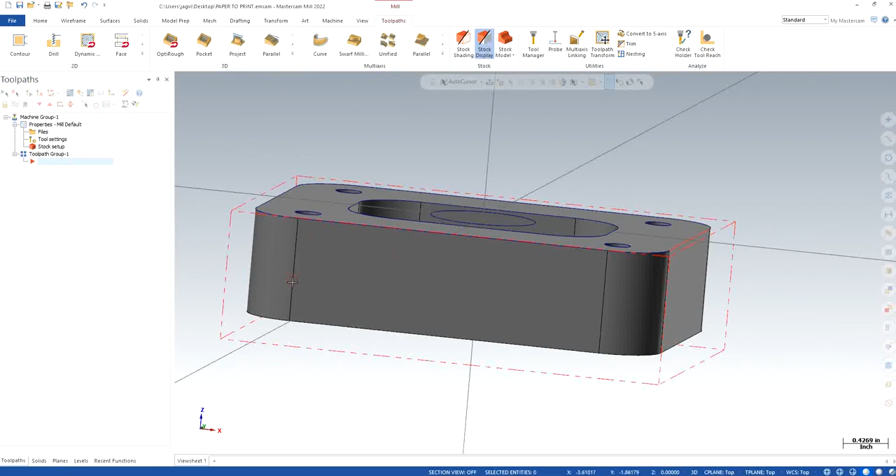So we have the red marking as the raw stock material that we are going to be working with. You can also see when I go on the front plane, I've left about 20 thou for the facing operation so that I can chip that off.

So the first operation that I'm going to use is face. I click on face, I don't need to select anything, I simply click OK. Click on tool,

and we will use the face mill which we already have right here. Click OK, 3-inch face mill. You can see that if you have a tool list, follow the tool list, whichever it is. You might have a 3-inch or 4-inch face mill. Generally 2 to 3 inches is standard.

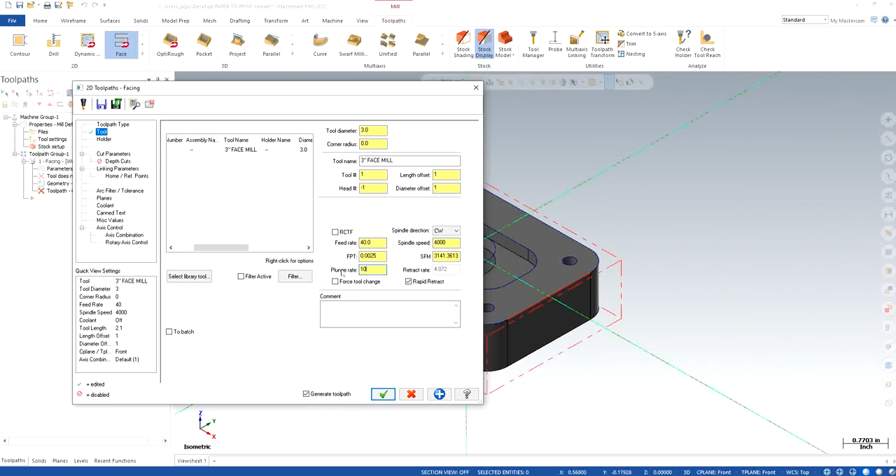Feed rate, you can follow according to the tool list. I'm just following a few numbers that I know from the top of my head.

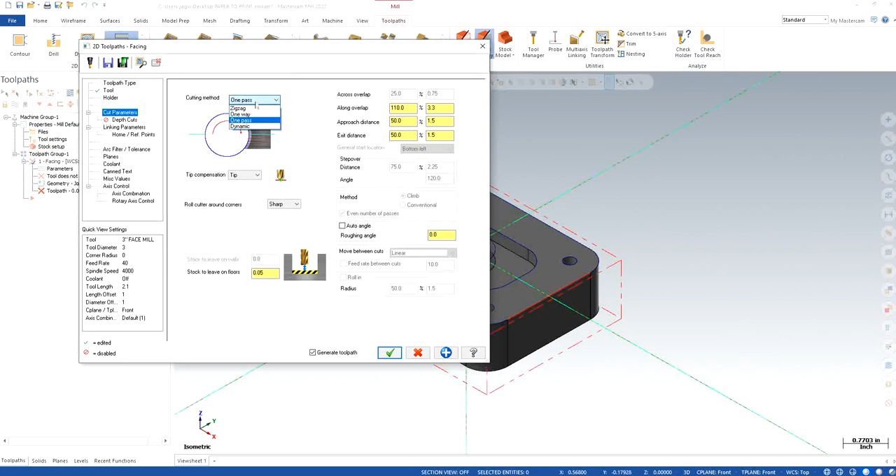Cutting method, one way could be zigzag or one pass if the tool diameter is bigger than the cutting part. In this case I think it is 3 inches, so I think it's going to show an error. Better to have zigzag. Approach distance 50%.

You can keep it 25 if you want to, not that big of a deal. Step over, I would rather keep 50%. Stock to leave on floor should be 0, we don't want to keep any material.

Depth of cut, you can turn it on, not an issue. Step down, keep tool down, it's just one pass anyways. Linking parameters, clearance, I just like to keep all of them in absolute because it makes my life easier. Top of stock in this case is going to be 20 because we left 20 thou for the facing.

Feed plane is generally 100 thou above the top of stock, so it will be 0.12, and retract value you can keep slightly higher than the feed plane, about 100 thou, which is already very close to it, so I'm just going to leave it at 0.25.

I'm going to use clearance at the start and the end of the operation, just for the fact that I don't want to spend too much time moving from one operation to another if there are multiple variations of it. So all in absolute, top of stock, everything looks good.

Come to plane, these are on front because I just, in order to show you guys that 20 thou stock material is above the origin, it automatically chose front, so make sure all of them are on top. Turn on the coolant, do not forget that. Everything else is going to be good.

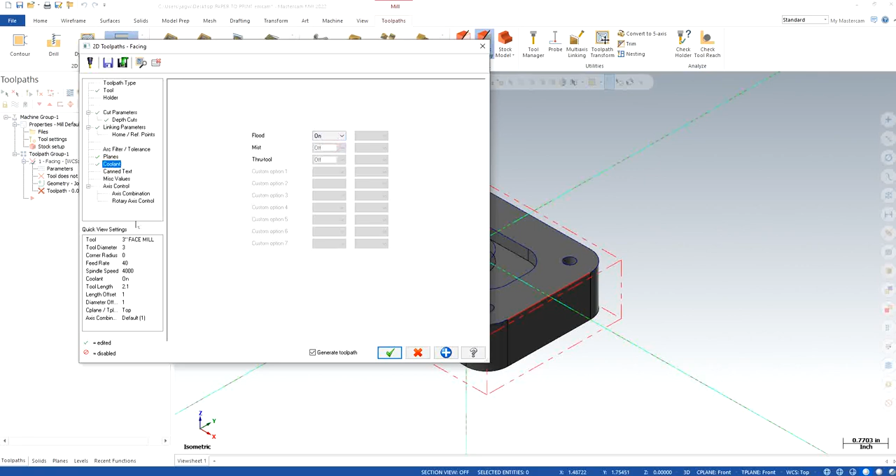There we go, you have the first operation made, that is facing. Now for the second operation, we can go for it. I'll just make all the operations first and then verify at the very end. If you want to verify, just use backplot.

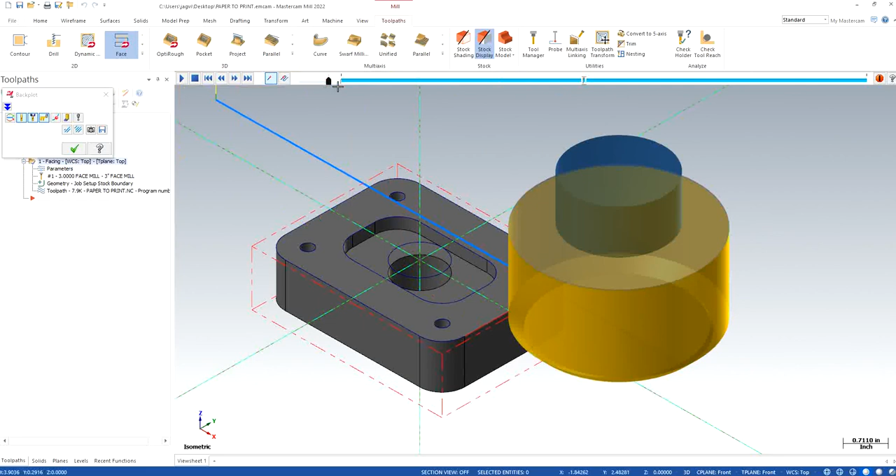You can just use backplot and see how it's actually going to cut, and you can see the zigzag motion, and it cuts really good.

So what I'm going to do now is make sure I get rid of the excess material around it. I'm going to use contour for that, using the wireframe. Click OK, and make sure the chain is pointing outwards.

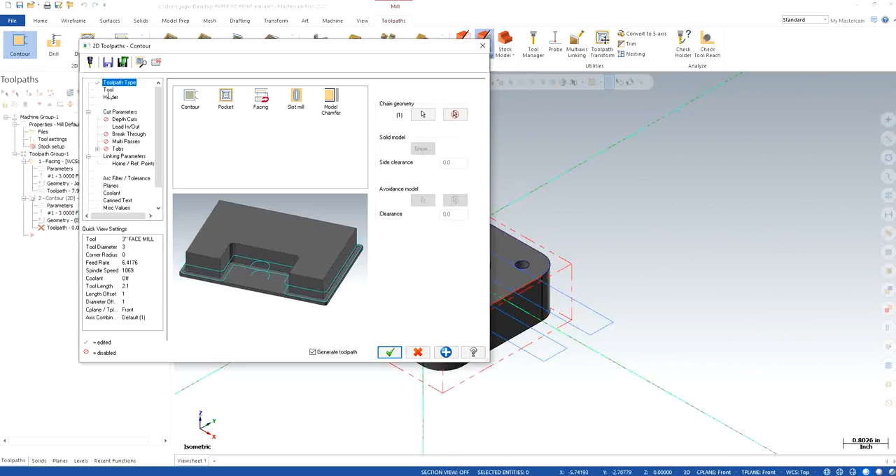I'm going to use a half inch bull end mill, with 1/8 radius. You can keep the feed around 24.

Spindle speed around 4000. They're very close to what they should be kept. Mastercam is already giving you an idea of what the spindle speed and feed should be.

For cutting parameters, stock to leave on wall, I'm going to keep it at 10 thou, just to make sure I have some material left for the finishing pass.

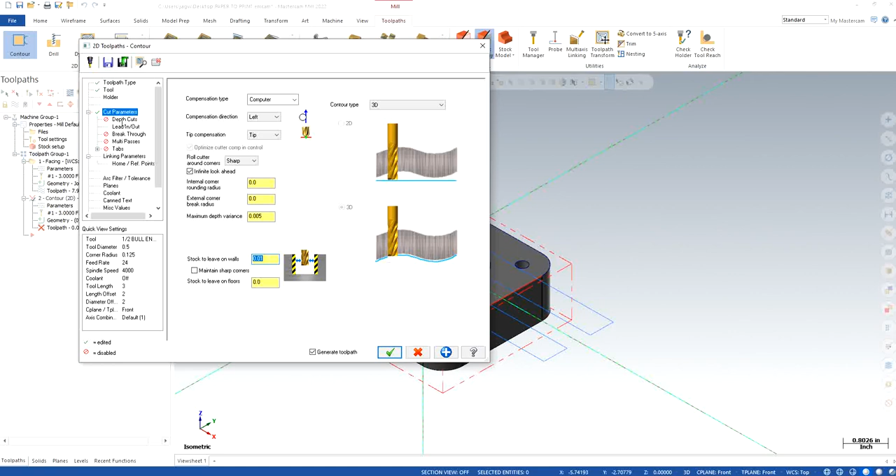For depth of cut, in this scenario I need to make sure the depth of cut is half of the tool diameter. The tool I'm using right now is half an inch, so 0.25 is really good.

For lead in, lead out, I'm going to turn off enter at the midpoint and make sure my lead in and lead out are at 25% each for entry and exit, and I'm going to overlap about 100 thou just to avoid any mark on the part itself.

Breakthrough, no. Multipass, only for the finishing pass. Going to make sure all of them are in absolute.

The depth is not visible for this one. For the contour, it's just taking in through all for some reason, that's weird. So I'm going to specify the top of stock, which is going to be 0 in this case.

Feed plane is the same, or you can make it 100 thou, not that big of a deal. Depth you can specify to be the end of the stock right there.

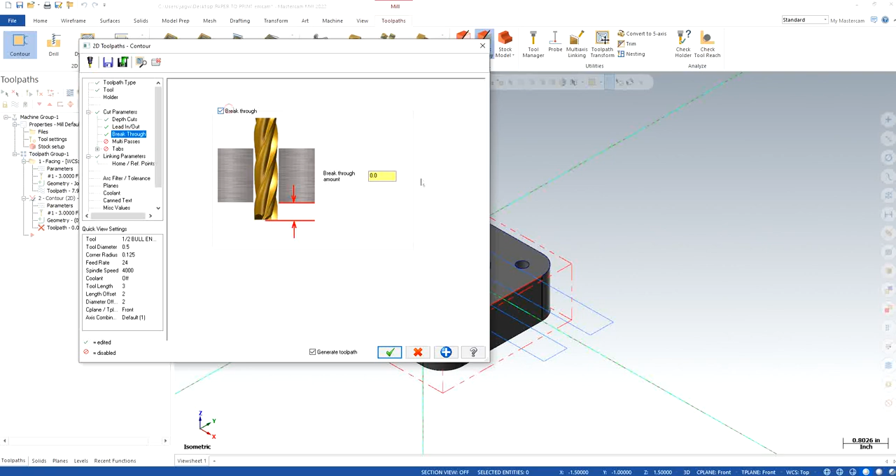It's very weird, it's not picking up, but we know that we can put in the value if we want to, -1. If you want, you can also break through it, by 100 thou, 0.1.

Then make sure coolant is on, and all the planes should be top. Oh yeah, that's why. Now I see, that makes sense, because the planes were top, front and front, that's why the linking parameters were messed up. So now we have the depth.

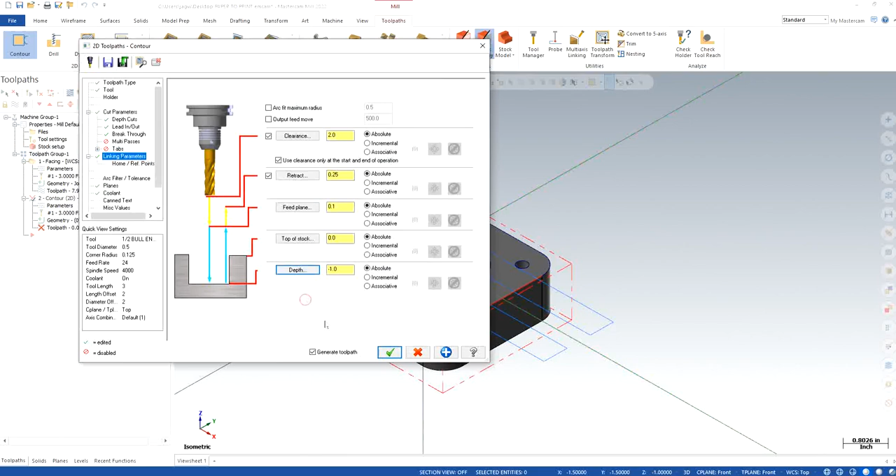I can simply click on it. There we go, it already picked up the point. Coolant, turn it on, click OK.

Now you can see that it is selecting the inside. Right click, change side, and you can see the arrow is pointing outwards. That's what we want. When we click OK and regenerate it, you can see now it's cutting correctly.

It is really important to make sure the wireframe and the selected toolpath are in the right direction and the arrow is pointing outwards, because you want to be cutting the outer material, not the inside of the wireframe.

So it looks good so far, but we still have 10 thou of material left on the side, so we need to get rid of that.

What I'm going to do is just copy this and paste it. Make sure the red arrow is underneath it, copy and paste it. The wireframe is going to be the same.

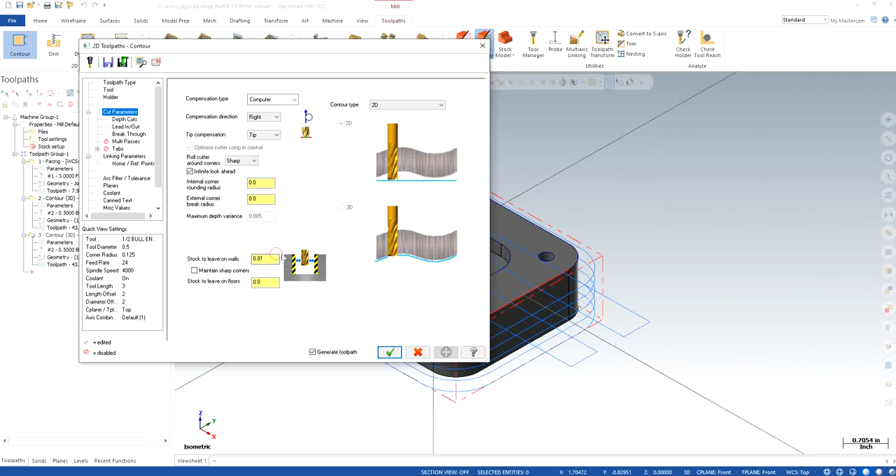I'm just going to click on parameters, and the stock to leave should be 0. Depth of cut, I'm going to just turn it off, because I just want the tool to go deep to the depth.

On the very first pass, just cut off the 10 thou that is left behind. Lead in, lead out, all the other parameters are going to be the same. Breakthrough is going to be the same.

Multi-pass, if you want, you can turn it on just for the finishing side to have multiple passes depending on your personal needs. You really don't need to, but it's better to have a better finish.

So it says that for rough, which we already did, we don't need to. We can keep it at 0.

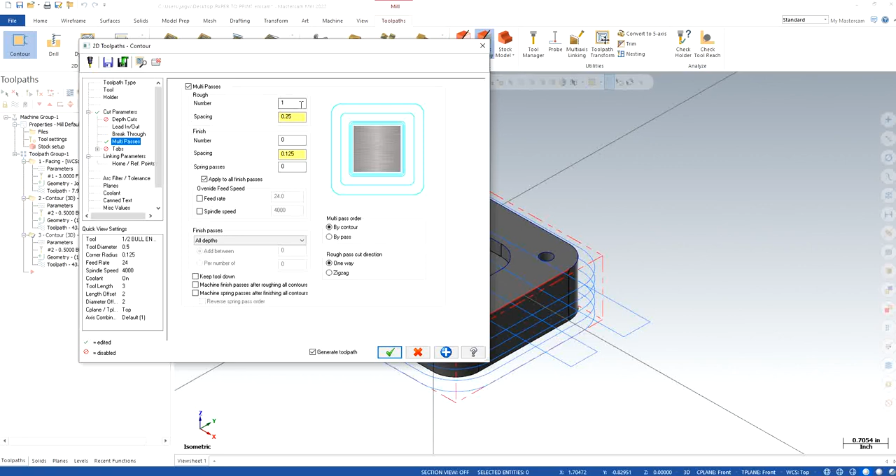For finish, if you want, you can keep like 2 passes, and for spacing, since only 10 thou is left, you can say spacing of 5 thou.

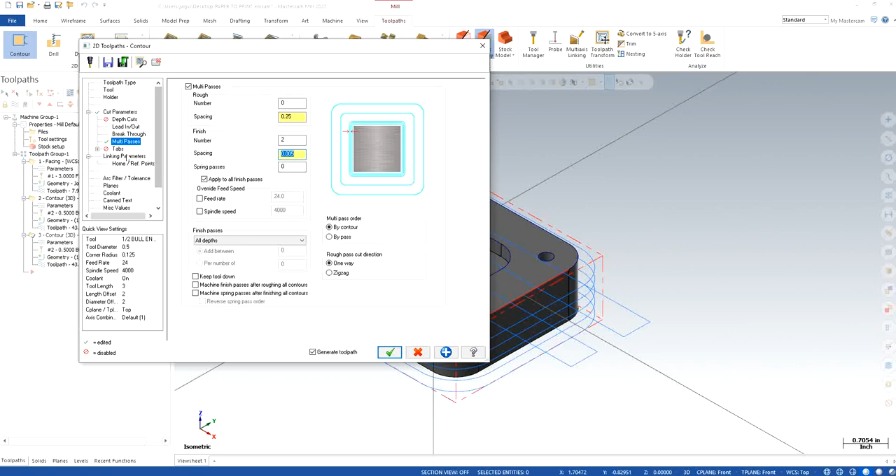And linking parameters are going to be exactly the same. Everything else is going to be exactly the same. Click OK.

Then you can see that, okay, you can verify how it's working. It's cutting the material and the second thou. So 2 cuts, 5 thou each, chopping of 10 thou at the very end, which is a good finish.

So we have made the outer boundaries perfect according to our needs. Now what we need is to make sure that we make drills and also this pocket and the inner pocket as well. That is really important. So we have one operation that is the facing, the other two are contours.

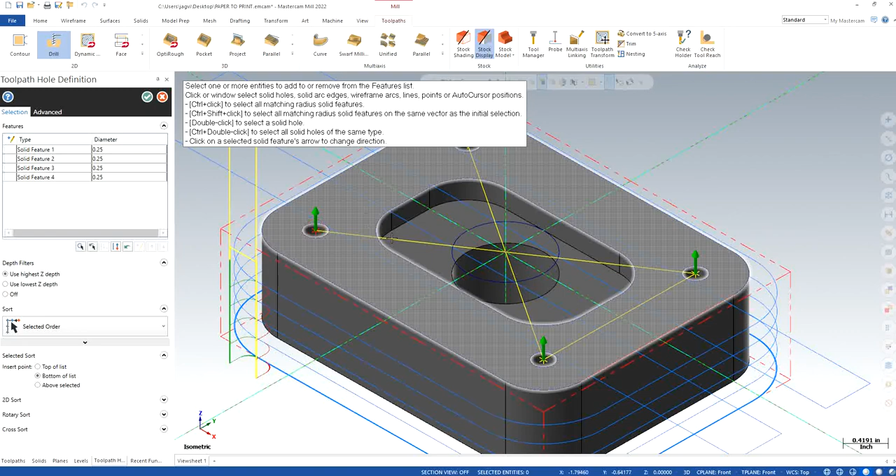So now it's time for drill. For drilling, you click on drill right here. When you control and left click on the hole itself, it's automatically going to select all the holes. That's one of the features that I've seen that is really good, in order to have multiple selections rather than selecting it individually.

You can also select the order. You can click on which order do you want to be selected in. So I want the drill to come into the first one, then to the second one, third and fourth one, which I think is really good. So this is the formation that I'm looking for.

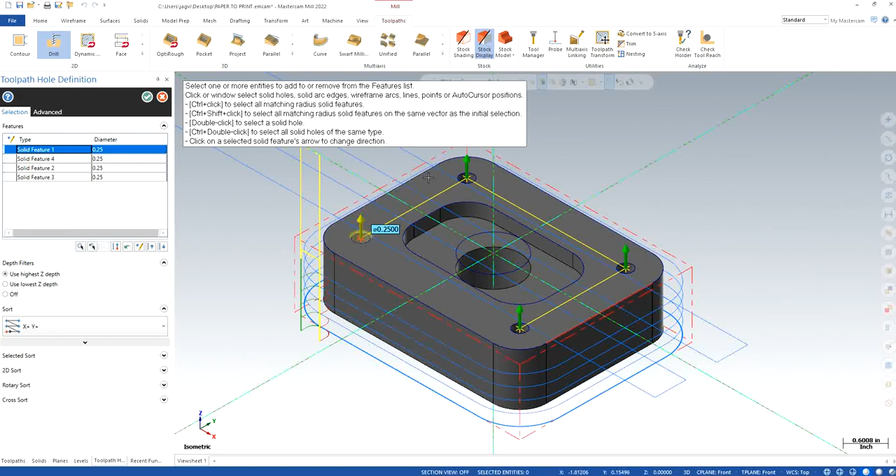I will click OK. I will go to tool, and right here I know that whatever the thickness is, if I'm not sure, you can also use analyze entities or analyze entity properties right here, and you can see that, okay, the diameter is 0.25 and the radius is 0.125, so we can use that.

Select tool. First of all, we are going to do center drill, so I'm going to use a center drill of 0.5 diameter. Center drill is basically just for centering, or you can also use a pilot drill to make sure that the alignment of the drill is straight, or the hole is straight. It's basically perpendicular to the part. That's what it's used for.

Feed rate of 14 - I'm slightly not sure what the feed rates of drills should be. I'll just go with 30 for now, and spindle speed of 3000. Everything else looks good, nothing much special. Linking parameters we can check right here.

I'm going to keep all the absolute value. The depth I'm going to keep here is going to be negative 0.25 because I just want a little bit of tip hitting in so that I have a marking on it to start with. Retract value 0.1, 100 thou over the top of the stock, because we have already done facing and have material left. I'm going to keep the drill around 2 inches above the stock. We can also check the collisions here.

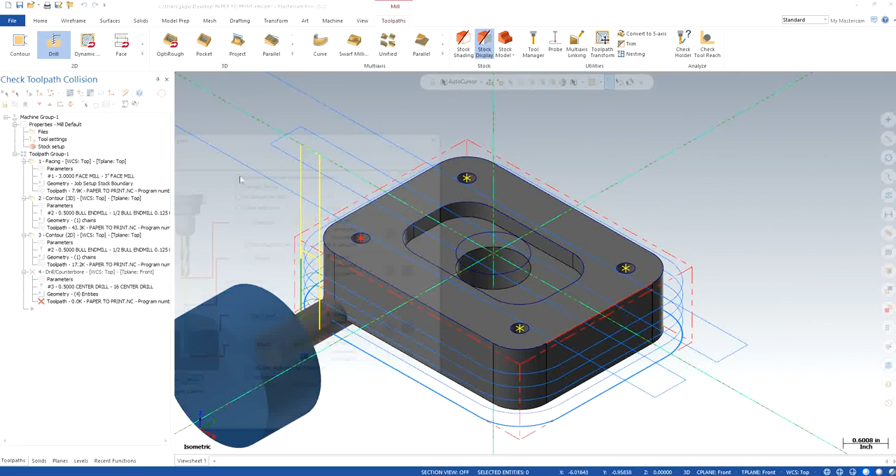Oh, I see, we haven't specified the tool yet. Okay, not an issue. The tool here is... 0.5 inches, okay, half an inch. We don't want that for sure.

0.5 inch drill - yeah, I mean it looks fine. Linking parameters are good, 0.25 depth. Okay, tip compensation planes, oh I see - front, top, and top. Now let's go and verify it.

Check collisions - alrighty. Unreachable shoulder, everything looks good. I never use this, this is my first time using it, so I'm just checking out exactly what this feature is capable of doing.

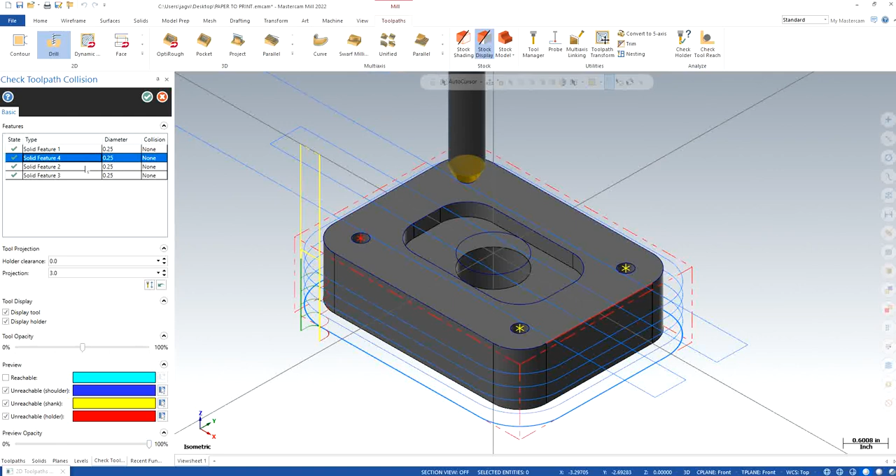Okay, tool opacity, alright, okay, makes sense. Reachability, unreachability, shoulder. Okay, shank, shoulder, preview opacity. Okay, not an issue. Okay, that looks fine, yep, that looks beautiful.

Click OK, there's no collision from my understanding. Turn on the coolant, make sure that's important. Click OK, there we go. You can see it's counter bore - basically drill counter bore. I think it might have given a chamfer as well.

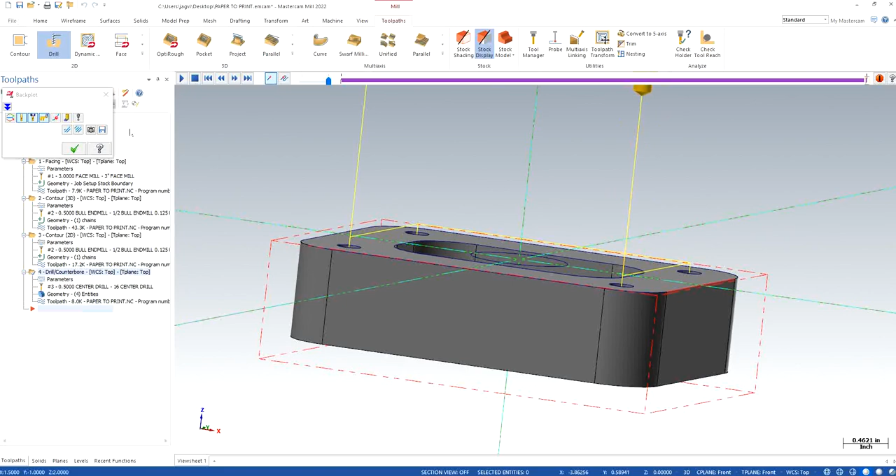We can verify that. Yeah, there we go, you can see I'm just letting go slightly to the depth, not way too much. You can also reduce if you want. That's not that big of a deal.

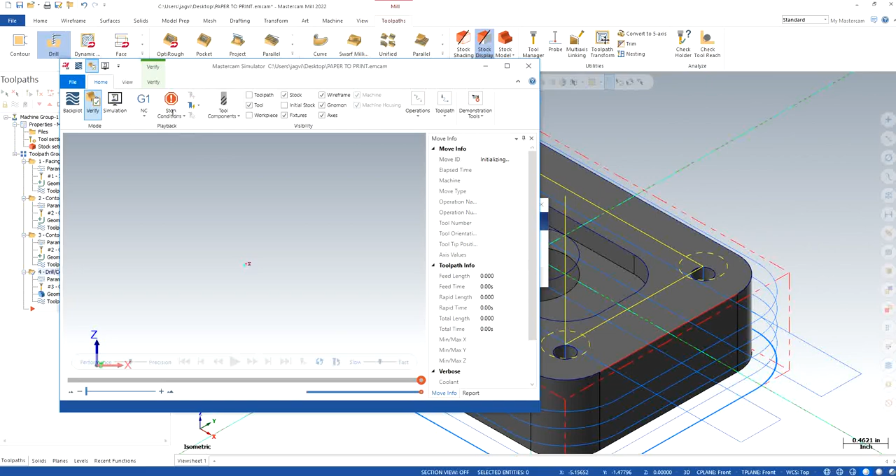If I just want to verify that particular operation, that's what I'm going to do right now. Let's see how that works. There we go, verify once again, and there we go. I'm going to turn the stop conditions on - collision should be on. Everything else looks fine. And you can see, yeah, I mean, it just looks a little bit too much just for the fact it's not phased. I think it's good for now.

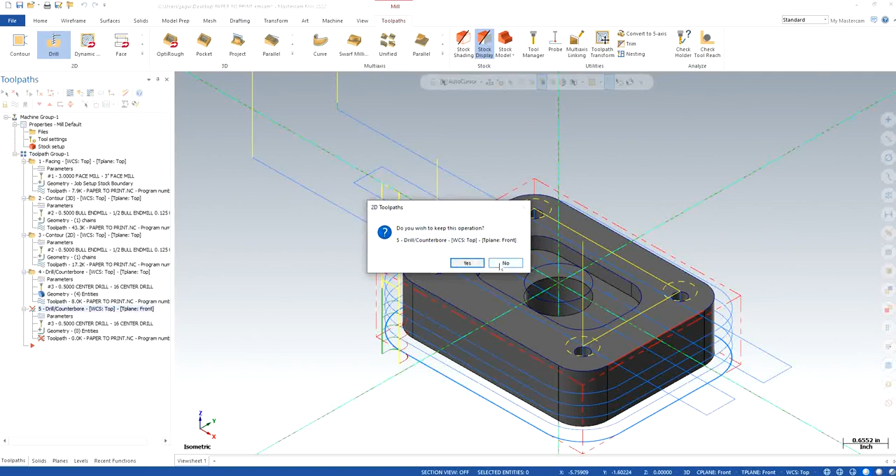We are going to use the proper size drill now. That's really important - we have verified it's 0.25 in diameter, 0.125 in radius. So what I will do is I'm just going to copy and paste the same operation.

Copy and paste. Geometry is the same, everything is the same. I'm just going to change the tool itself. I will go to tool, go to none, choose drill, and the size should be equal to 0.25 in diameter. So 1/4 drill, this is the one we are going to use.

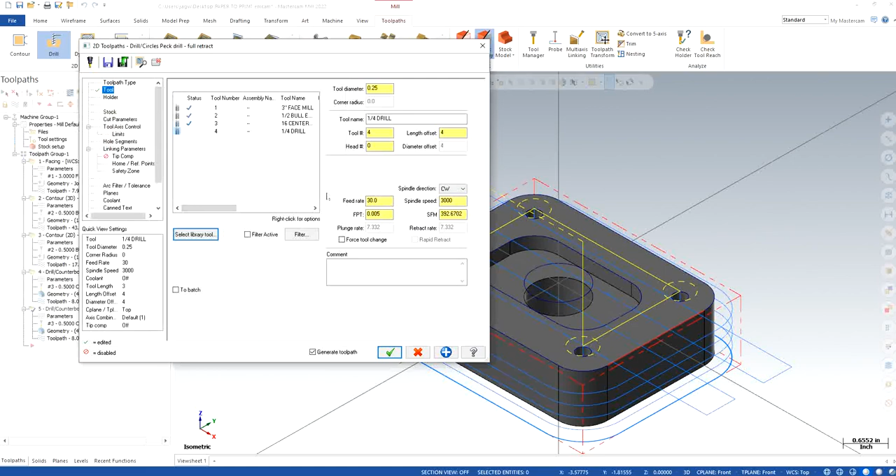Drill feeds and speeds, not sure, not gonna change, not gonna mess with it. Holder and everything looks good. Toolpath is good.

Linking parameters going to keep the same. The depth will be different because it's through all. And also going to tip compensation, I'm going to increase breakthrough amount to be 100th as well. Or what you can do is you can simply go here and say that okay, just add whatever the depth is, so that you can turn off the tip compensation. You don't need to.

Or if you already know that there is no feature underneath or on the back side of the part, you can simply just add whatever the break through all value you want to.

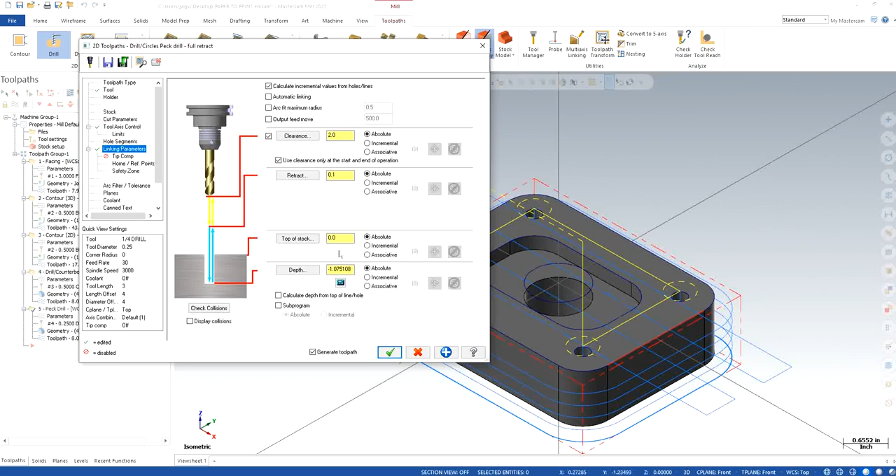So now everything is almost done. All of them are on top. Coolant should be on. Click OK. There we go. We have peck drill through all 0.25.

Now what I'm going to do is the next one. So we are done with the outer. We have done face, we have done contours, then drill, then peck drill. Now we are working towards the inside ones.

So I can use two different methods. One is going to be pocket for the slot, and then the bigger one, the middle one, I can use the dynamic milling. For the center one, I'm going to use dynamic. The same machining region is going to be the center one. I'm already done with that right here, starting from here.

And yeah, I will just make sure that I start from there. Preview chain overlaps itself. It says stay inside.

Avoidance region, air region, containment region. Okay, alrighty, machining region is going to be inside of this run. Change side. Okay. From outside, no. Avoidance region should be this one.

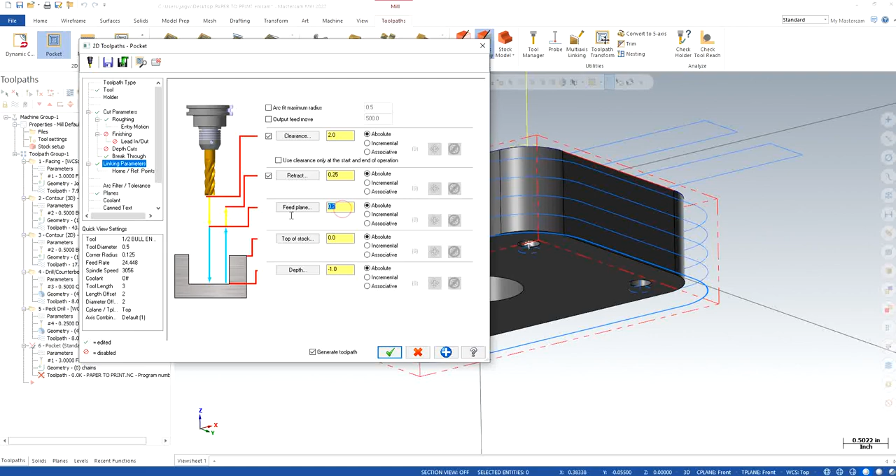0.1. 0.1 is going to be the top of the stock. Use clearance. Breakthrough value. Plane and coolant right here.

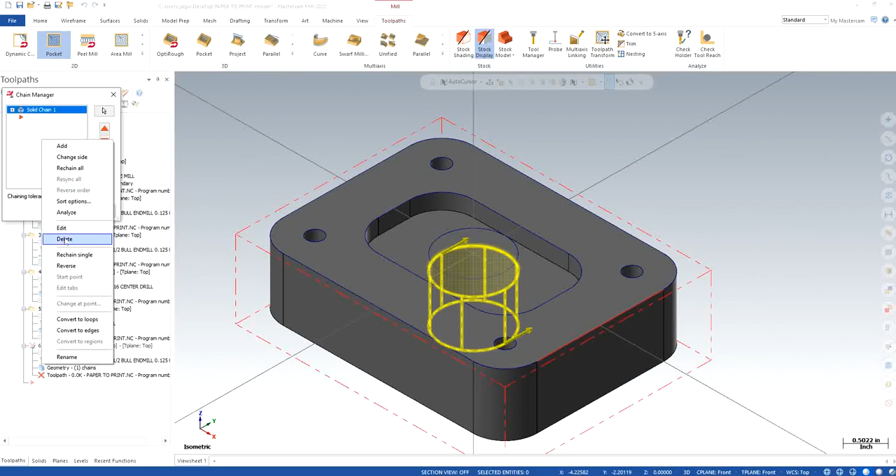Pocket, yes. I think it's showing some error because of the chains that I selected. Yeah. Delete. Add. I'm going to use the wireframe itself. That's fine. There we go. Yep.

There we go. I'm going to see how it's working. Alrighty. Okay. That's a lot of plunging.

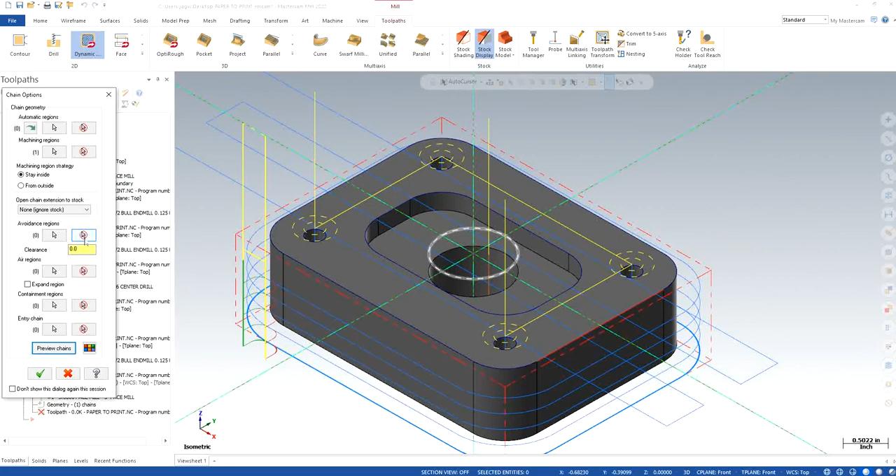Preview chain. Okay, not this one. Machining region should be this one as well. Preview chains overlapping. Air region should be the one that should be the other side. Air region is a non-cutting region.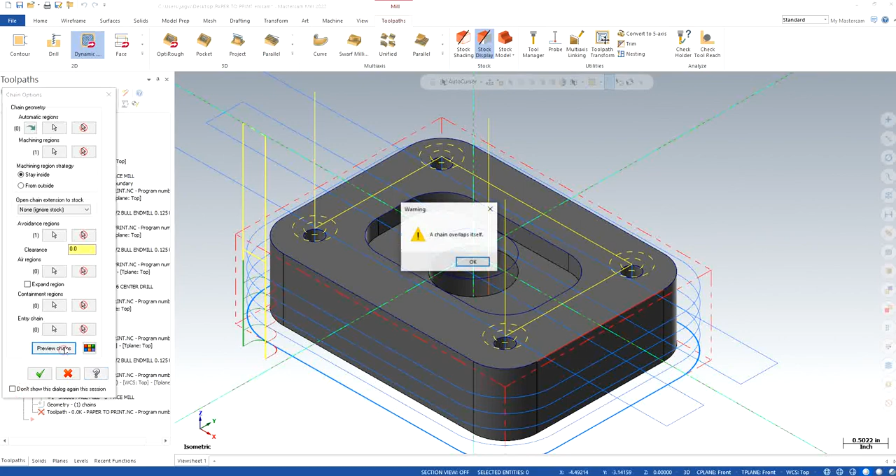Chains overlapping. Why so? That's very weird. Avoidance region is this one. Chains are overlapping. Avoidance. Oh, maybe because of the planes. Yeah.

Keep everything in the top plane, make sure it's isometric. Dynamic mill. Machining region is going to be this one right here.

Yeah, there we go, that was the problem. The planes itself was the issue.

Again, machining region, this time I'm going to choose solid. Start right here.

Or before that, I think it's better to choose machining region to be at the top because we haven't machined this slot yet. I'll just go with all the best possible tools that we have.

I'm going to use an end mill. Approach distance is fine, 0.

Alright, step over distance to 50% is good enough. Stock to leave on wall, I'm going to keep at 10 thou. Stock to leave on floor, 0, definitely.

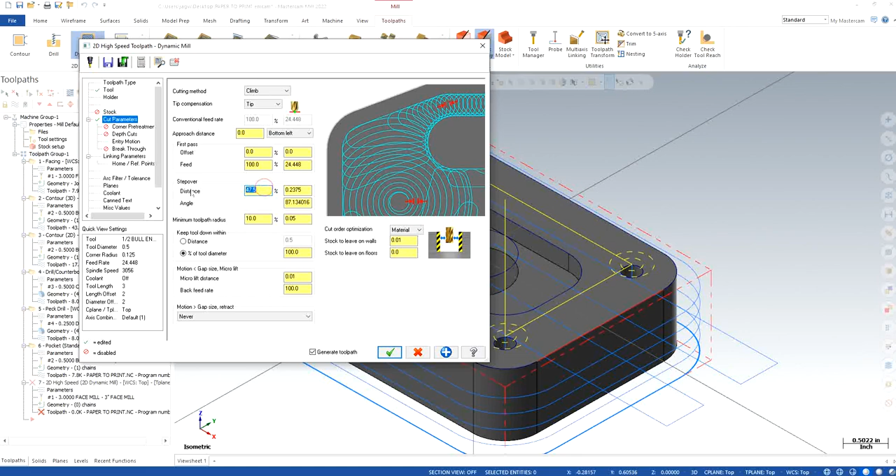Depth of cut, turn it on half of tool diameter. Good enough. Breakthrough, nothing is there on the other side of it, so why not?

Absolute all the way, absolute. Top of stock should be 0. Feed plane according to it.

This should be at end, -1. Plane should be all top. Coolant should be always on. Not a bad deal, good enough.

So we can get rid of this pocket, or what we can do is we can just change the wireframe and make sure that we cut off that extra material.

So I'm going to rechain all and say that okay, instead of cutting that, I want to cut this region, and I will change, reverse the direction of it. There we go.

There we go. So I'm just going to change some other parameters for the pocket as well, just like linking parameters. Top of stock is 0, depth is going to be right here, and there will be no breakthrough. Just cut the breakthrough right there.

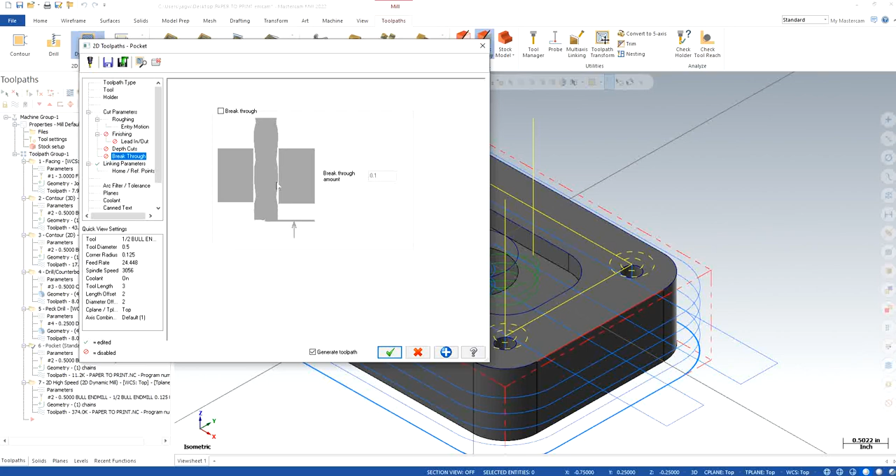And also I have to make sure that I have some material left which I need to get removed of.

So what I'm going to do is I'm going to copy this operation, the pocket operation, Control C, move my red cursor up and paste it right here, pocket, and I'm going to do the same thing.

Remove stock 0, make sure all the other parameters are good. Roughing is going to be finishing now.

You're going to be using finishing, one finishing pass, you can keep whatever this thing is. 5 thou spacing for 2 passes, or even 10 thou if you want to, not an issue for 1 pass.

Lead in, lead out, sure, why not? 25%, 25%, same thing goes in 0.1, and yeah, depth of cut, you can simply turn it off because the entire material is gone.

Nothing else to change, yeah, nothing else to change, literally. Coolant is on, everything is good. Yes, so it looks good.

So we are done with most of it. We got all of that material. We just have 10 thou left for this one, high speed finishing that we have.

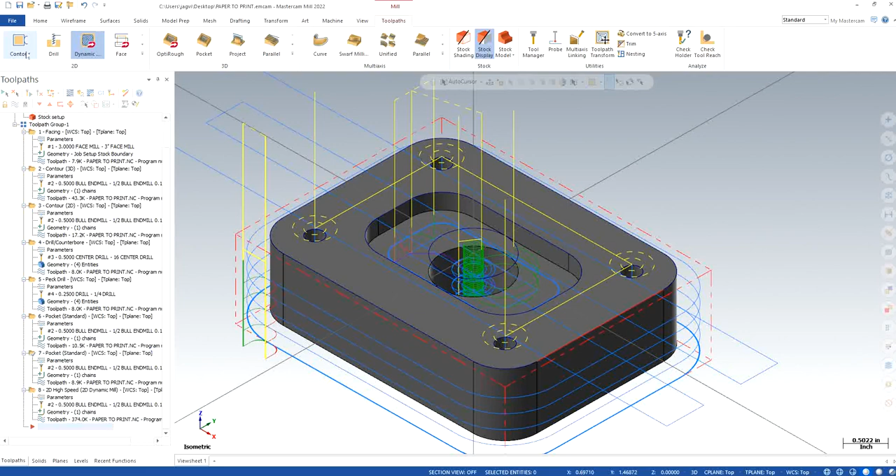So I can now either choose to do a simple contour, which is not that big of a deal after whatever the material is left to cut. Choose the tool, half-inch tool, good enough.

Cut parameters, stock to leave 0. Depth of cut, turn it off, it will go right to the depth. Breakthrough 1 thou. Okay, I mean it's good, it's all good.

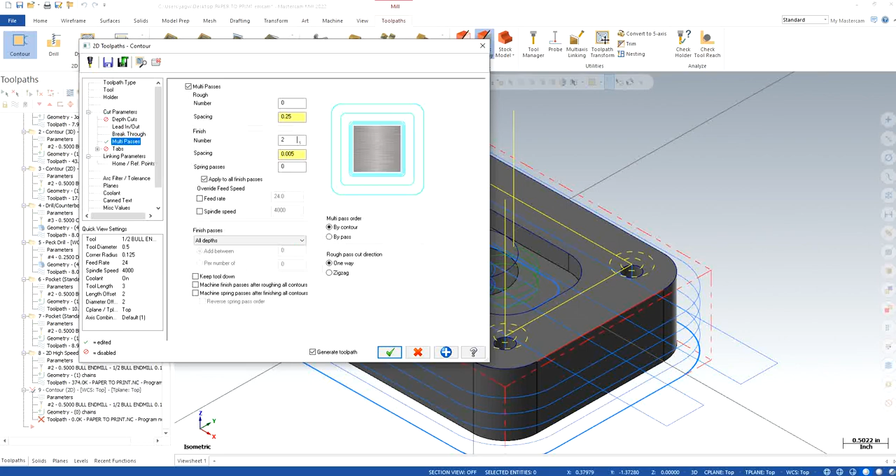Top of stock should be 0. Depth should be -1 right here. Plane, top all of them. Coolant on, there we go.

Change the side, you can see geometry is wrong. Change side, turn it on, good enough, and save for now. And let's select all the toolpaths and see how it works.

I'm going to maximize the screen, zoom out a bit, verify, color loop, just to differentiate. Performance I'm going to keep slightly high so it looks good.

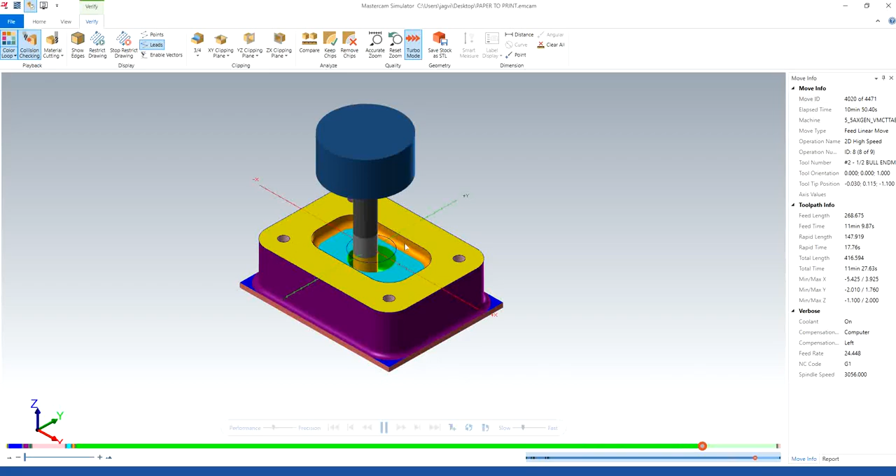High speed machining, my friends, and you can see why do we have this material. Maybe it's just a precision itself.

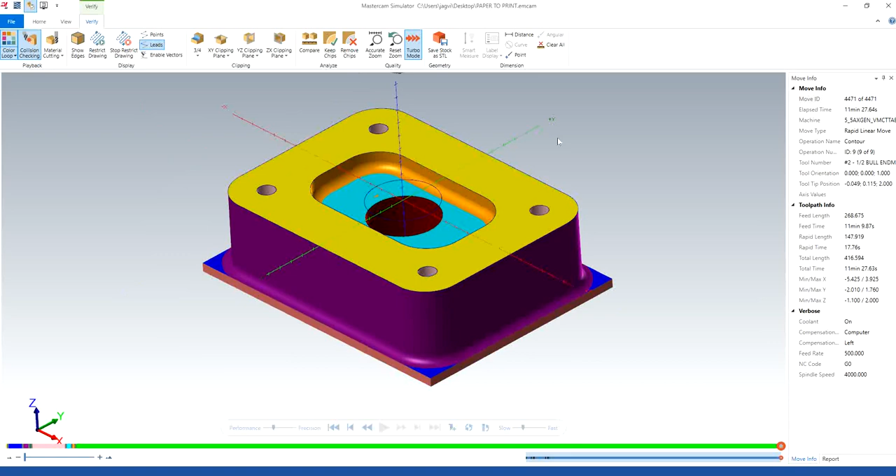And yeah, don't worry about this material right here, it's just a little bit of stock material that is left. I can just add in a little bit of extra depth to all the parameters, but you can see that there is, because of the lead in and lead out, there is some issues right here. Which operation is that? The blue one right here.

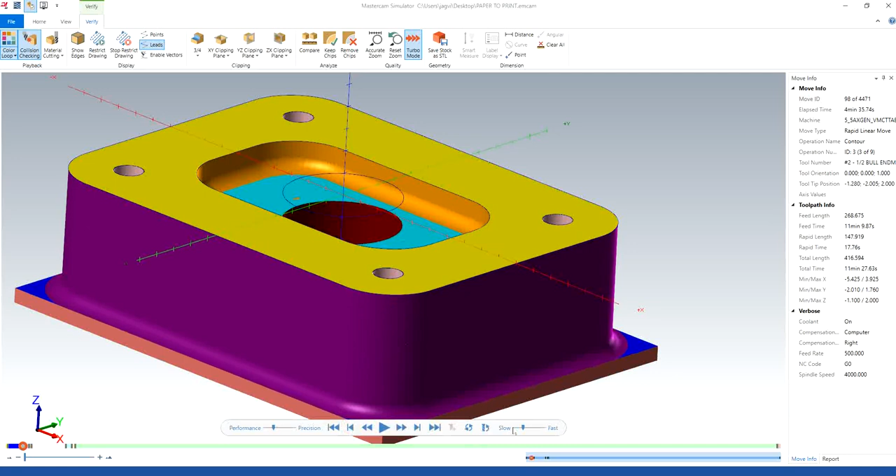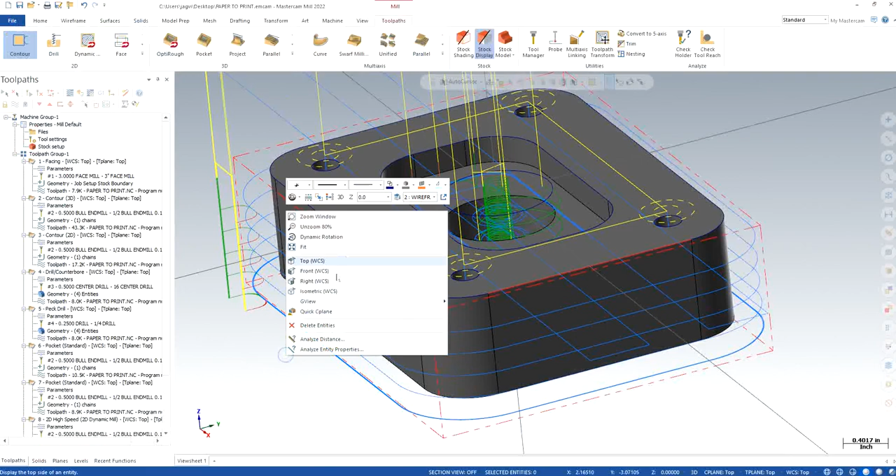Alright, let me verify it once. Okay, this is the side. Let me verify individually. Everything looks good. Facing is good, contour is good. It must be one of these ones. I need to make sure. Okay, just verify this one.

Oh, okay. Ah, that makes sense. Alright, let me verify once again the parameters for this one. The standard tool is half-inch bull. Why not use half-inch flat indeed? Yep.

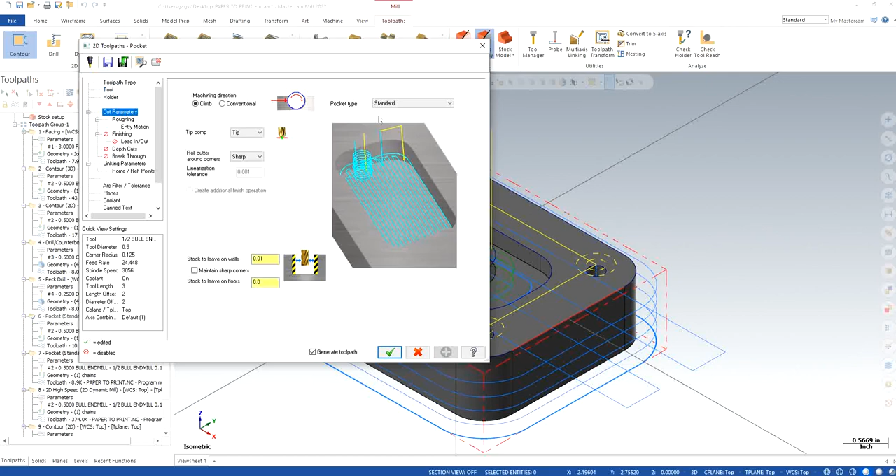Anyways, let's see, top of stock. Roughing parameter constant, parallel spiral. Let's see, step over percentage should be 25. Entry motion, okay, keep it 20% as well. Maximum radius, plunge, skip, feed rate, finishing. Alright, lead in, lead out, depth of cut.

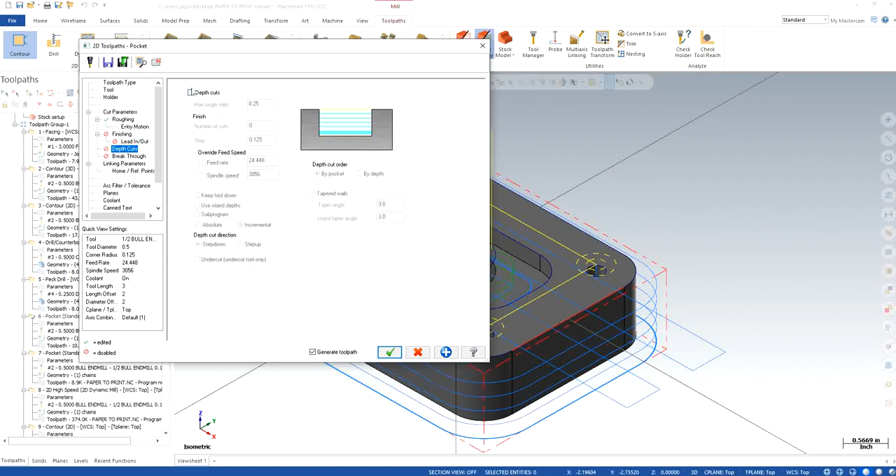This is for the roughing one, yeah, good enough. Linking parameters, good enough. Plane, good enough. I mean everything looks fine. That's not that big of a deal, doesn't look that big of a deal to me.

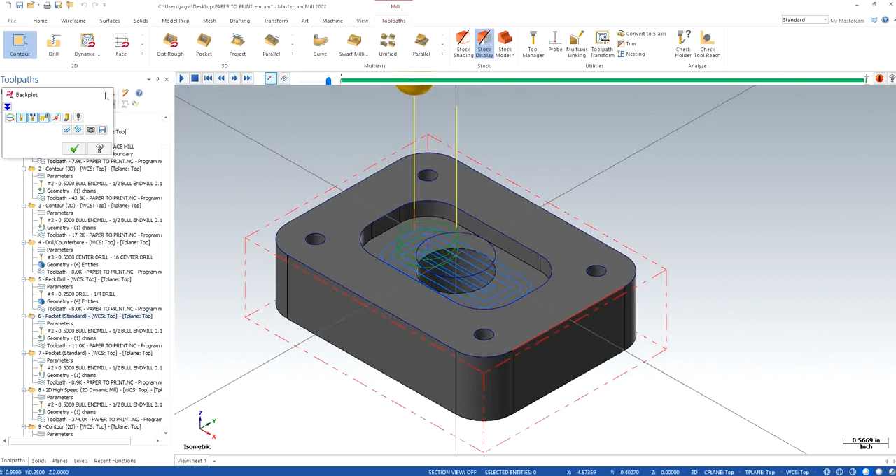Okay, it's cutting in the pocket, but it's cutting in a very different way though. Kind of slightly weird, but good enough. And this is the contour for that. Overlap value is slightly less because the tool is slightly bigger than what I expected.

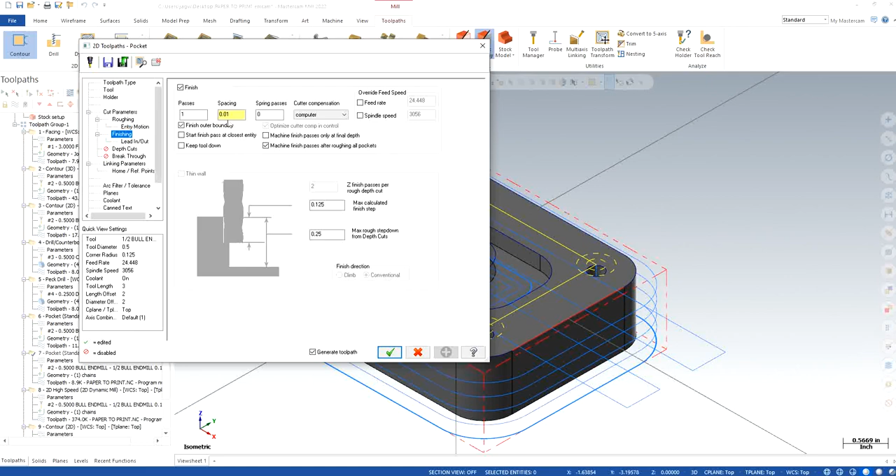Roughing should be off, entry motion eventually off, spacing is fine. I can indeed have two of them. Lead in and lead out 25%, tangent, helix motion. 0.2 if you want to, not an issue. 2.5 to be precise.

Alright, and for the pocket, alright, finishing, roughing. I'm pretty sure the breakthrough is not on, because that's the one that must be keeping an issue. Keep tool down. For roughing, parallel spiraling, constant spiral or parallel spiraling.

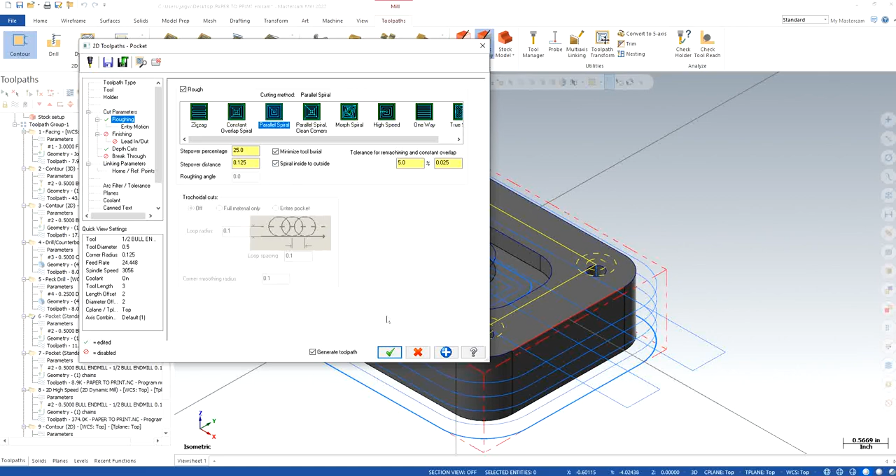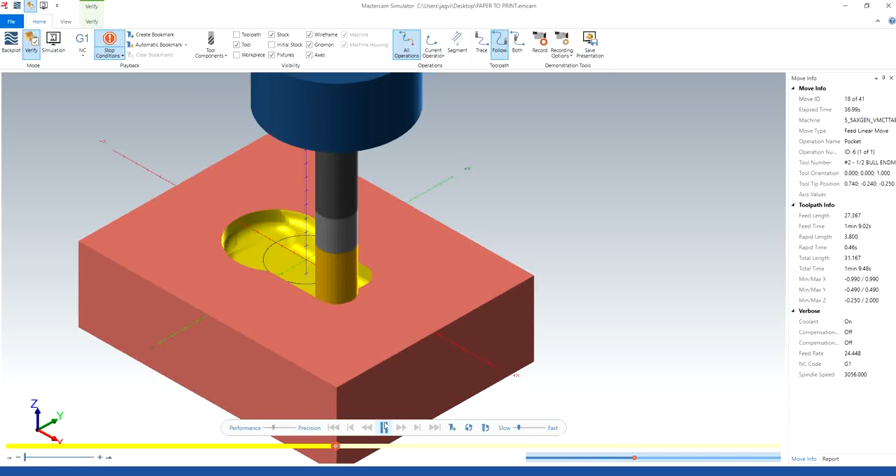Alright, entry motion 20. Yeah, it's good enough. Right here, selecting only that operation for now and seeing what exactly it's going to do. Alright. Okay, I think it's just the quality of it, precision itself. Everything else looks good to me.

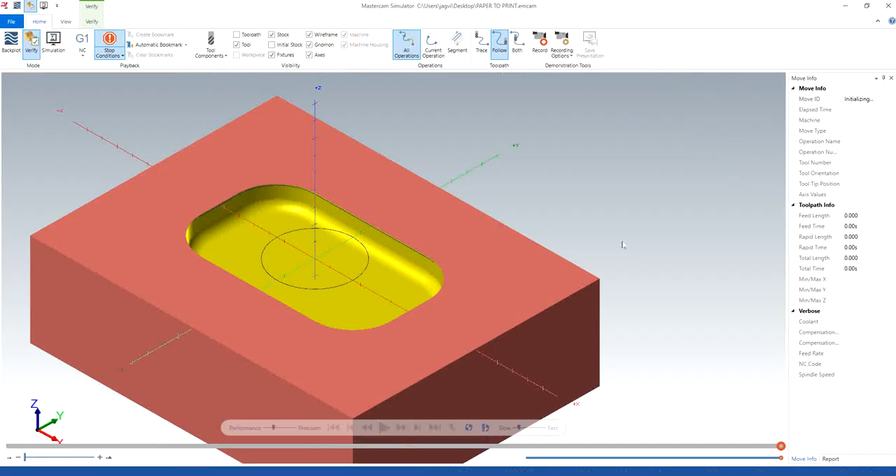Yeah, everything else looks good to me. Precision is going to increase for a while, so that I know that. Okay. Huh.

What is this operation right here having the issue? The blue one, wait a second. Okay, this is the drills, drills are fine. All drills look good. Then when it starts cutting this one.

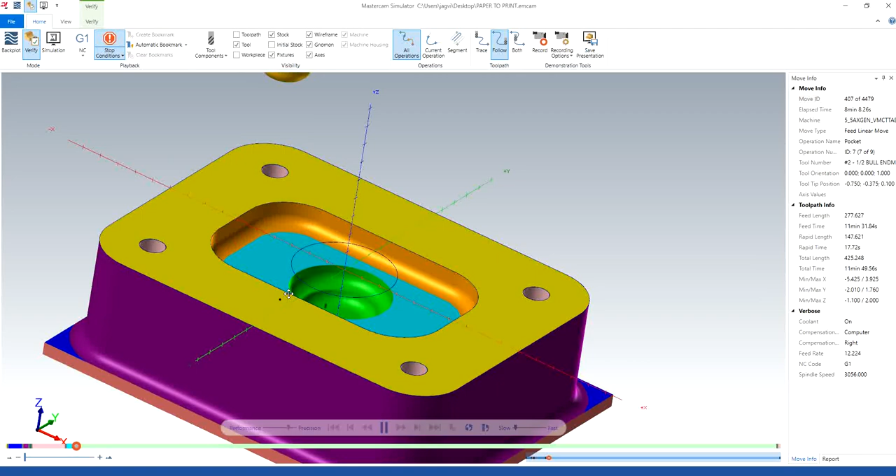Okay, very weird, the blue one. Which one is the blue one though? The blue one is the contour, right? Right here. Oh, I see, oh I see now. Oh, okay.

Okay, that makes sense. I will be deleting number 7 and I will be adding a contour to it. I'm going to copy number 8, move it right here, paste it right here, paste it right here, and change the geometry of it. Rechain all right here inside. Click OK.

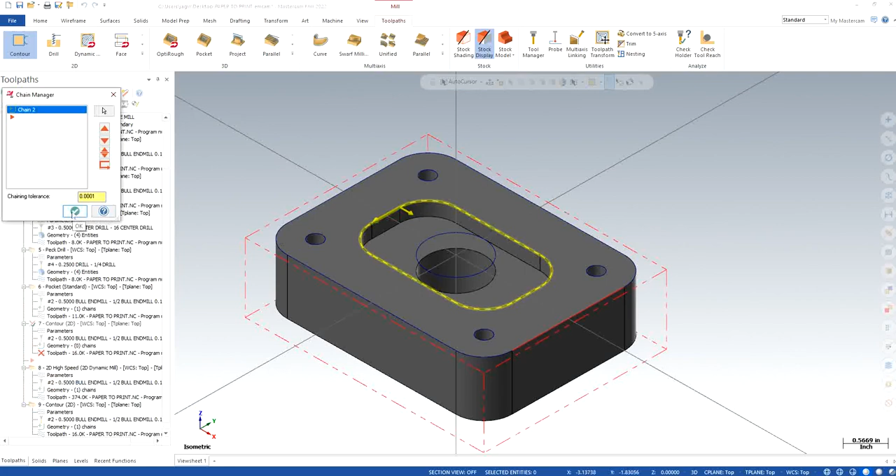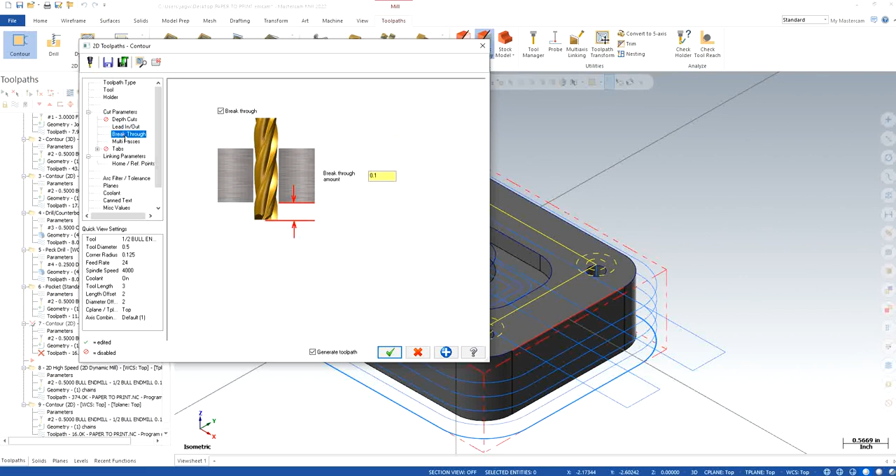Parameters, tools right here. Bull endmill, everything looks good. Depth of cut should be turned off because that's for the finishing one. Everything else is good. Breakthrough should be off as well. Multipass, 2 of them for 5,000.

Sure, why not? Depth, we are just going to keep this one because we are just going till there. 0, 0, 1, good enough. Top of them, coolant should be on. Good enough. Yes.

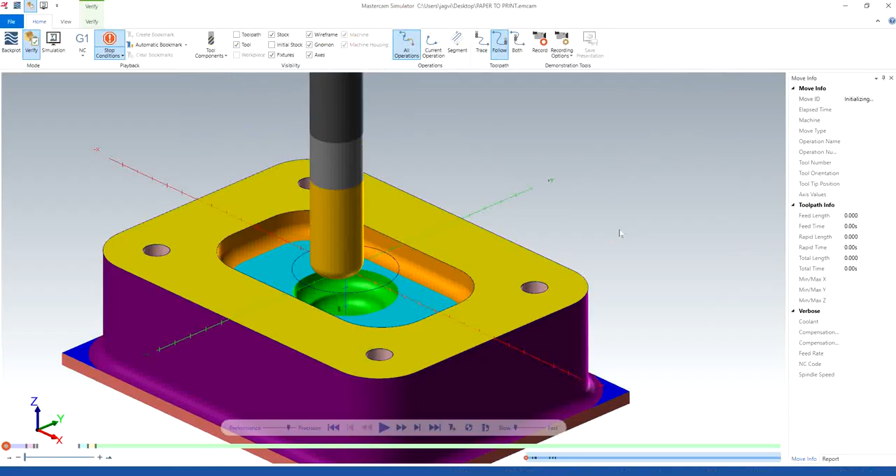I hope we cleared the issue now. Still having this, but yeah. It looks really good. It just, I think the fact is now I just need to make sure that there should be no breakthrough. That should be on.

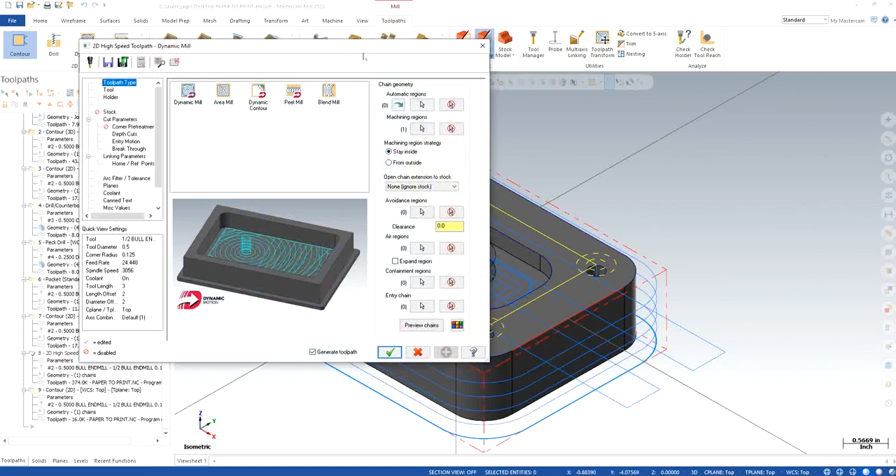No breakthrough is on, nothing is on. It's just parameters. Multipass is on, breakthrough is not on. High speed is doing the other operation. Contour is doing the other operation. Yeah, everything looks fine to me.

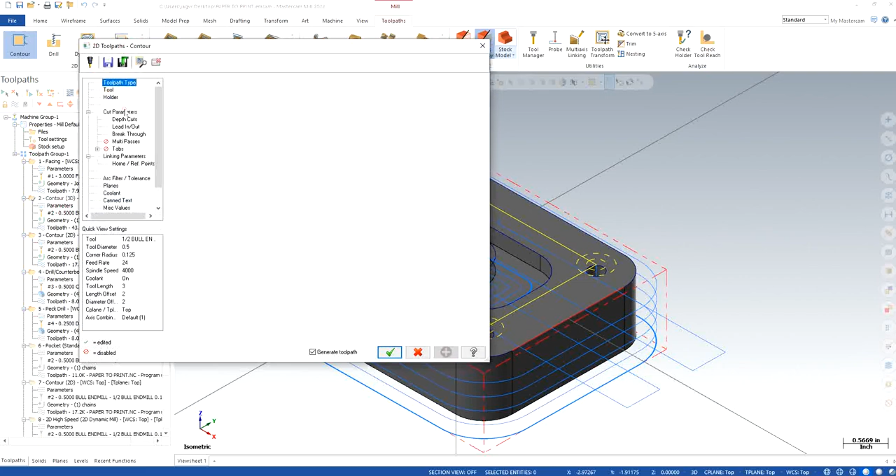So now if you want to increase the parameters, the depth of them, sure, because that's the only thing actually left, or I would say, think in parameters just rather than add like 250 thou in each, that you see 1 inch.

I mean, it's pretty basic, not for the center drill. Peck drill, you can, we have already added that much material, but we are also going to add 0.25 on top of it. Sure. Oh, it's going to be the other way.

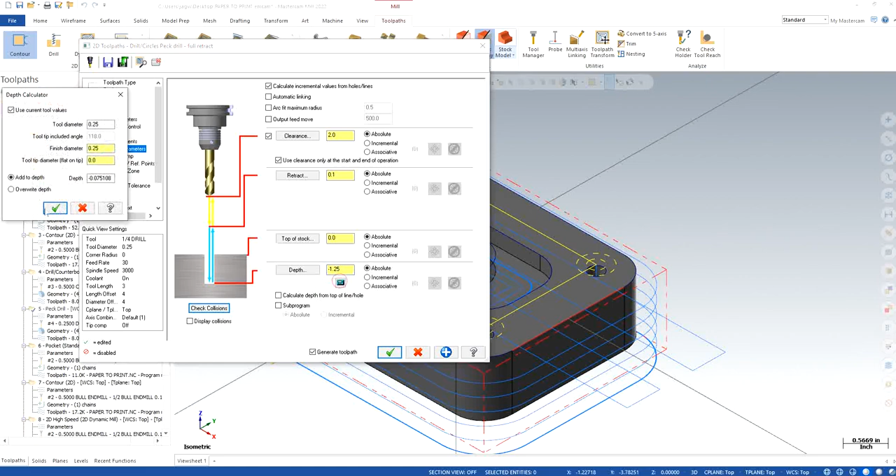Negative 1, negative 1.25. Over that we are going to add this. There we go, good, looks good. Then for the pocket as well, we are just going to add, okay, this is fine. 0.25, make sure 0.25 looks good.

For this one, we are going to add some material, add some 25 to 50 thou, and similarly on here as well, 250 thou. I'm pretty sure now this should be good enough for everything that we have encountered with. Shouldn't be an issue. There we go.

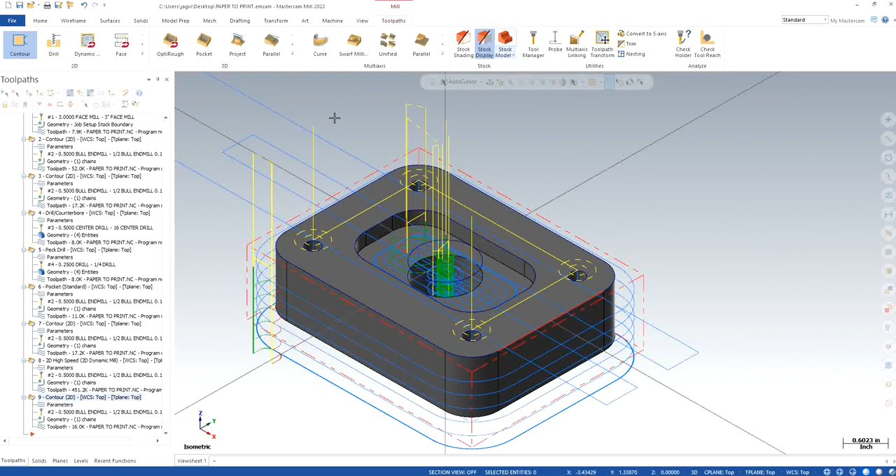Right here, we are cutting material, we are cutting that right there, and that's high speed. There's a contour, finish, that's it. So that's pretty much it, guys.